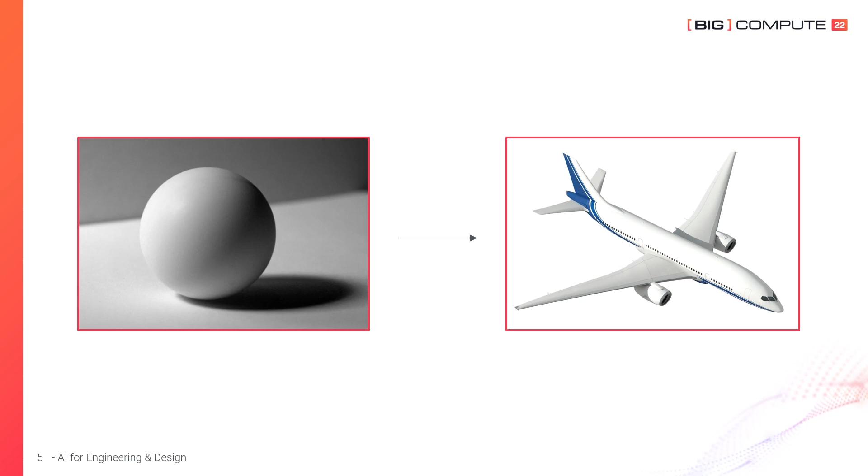So if we have a carefully designed algorithm and simulation and lots of computation power, we're able to automate a subset of designs, such as optimization of the wing and the shape of the wing, and the external aerodynamics of the aircraft. For example, we can take a sphere, put an optimization algorithm on top with a few constraints and objectives, and turn that sphere into an aircraft, as you can see here. Now, that's far from being able to design an aircraft from end to end, but it shows the potential.

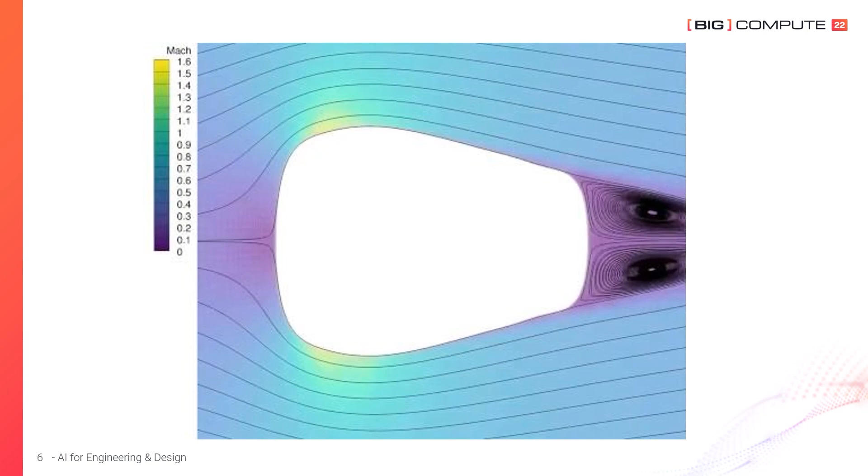So, why is it so difficult to achieve this? Today, why does designing a complex engineering system, such as a commercial aircraft, actually involve tens of thousands of engineers and years to come up with the design and achieve the objective? There are two factors leading to that. Number one, the algorithm is just not smart enough. What I mean is that if you have a well-defined problem with the objective and well-formulated constraints and boundary conditions, yes, the computer algorithm has proven to do very, very well. It can come up with an optimum design within that design space, and it can often come up with designs that are much better than what engineers can come up with.

Now, in a real-world situation, it's often very, very hard to come up with a well-formulated problem and a design space. In a real-world situation, you may have millions of different constraints, and even missing just one of them may lead to a useless design. So we need an algorithm that not only can explore this design space, but maybe is even able to come up with the design space or the problem itself. And that's where artificial intelligence and machine learning algorithms come into the picture.

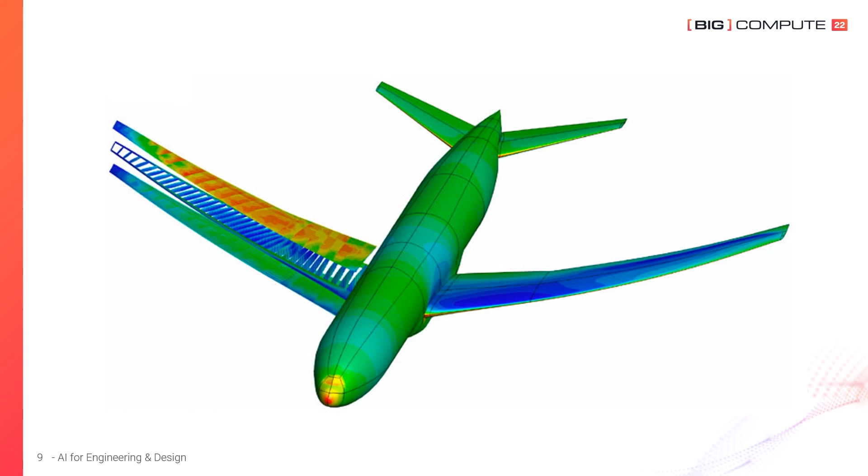Now we have had lots of advancement in this area in the last decade, and more recently, applied AI for engineering design. And we have seen many of our partners and customers start to develop specialized AI/ML algorithms and software tailored for their engineering simulations.

And we've seen also our cloud provider partners really develop some of the infrastructure layer to make it much easier to apply any of the AI/ML algorithms running on the cloud infrastructure. Now, while we're not there yet, that we're able to turn a sphere into a commercial aircraft design, we've seen that AI-assisted engineering is now starting to be applied in the industry. And you may hear some of those examples from our partner presentations today.

Now, the number two reason is the sheer amount of computation power needed to solve those problems, and solving them at a scale never seen and never done before. So with the advancement of cloud computing technology, those types of elastic or burst computational resources have now become more accessible. Particularly GPUs, where now you can use hundreds, if not thousands, of GPUs to run those large-scale trainings. And so engineers and scientists are now able to really leverage that, combining the different AI/ML algorithms to tackle those problems today.

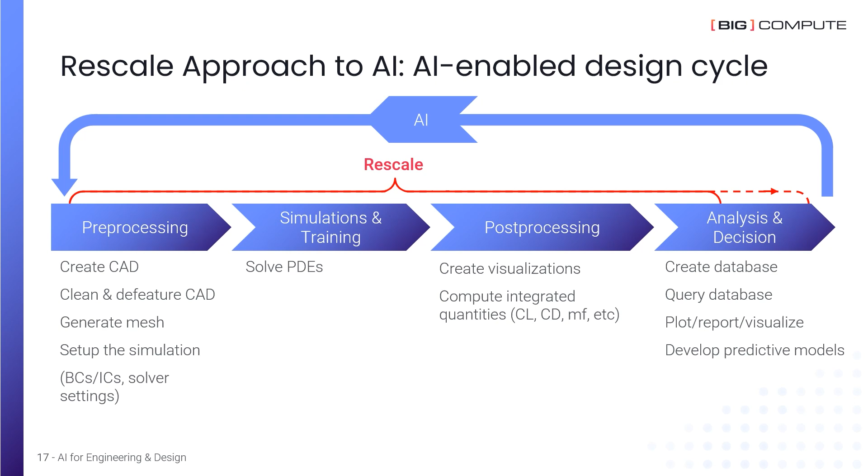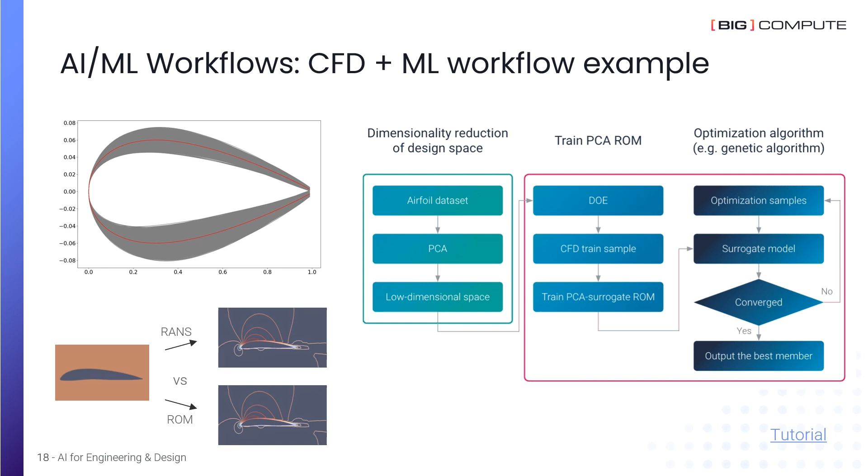So by AI for E&D, we mean automating this engineering design cycle and its subcomponents as much as possible by taking advantage of these new technologies on the Rescale platform. With this vision, we went on to develop example workflows relevant to some of our customers. For example, this ML-driven optimization workflow trains a surrogate model to rapidly design airfoils. This workflow not only produces a surrogate model for the end user, but it also uses a partially trained surrogate model to accelerate its own training process. You can take a look at this tutorial to learn more about this workflow.

Building the previous example helped us identify some of the gaps we have in the technical capabilities and expertise. As described in the diagram, building an AI-powered workflow at scale on cloud requires well-abstracted and scalable application layer and hardware infrastructure layer. So supporting the AI box on top would be exceedingly complex if we were to build all the capabilities from ground up.

So instead of aiming to build all these capabilities by ourselves, we build partnerships with other players in the ecosystem to integrate with their technologies and expertise. And two, we build core functionalities and interfaces needed to enable these integrations at scale. Now, let's take a look at some of the examples of these integrations.

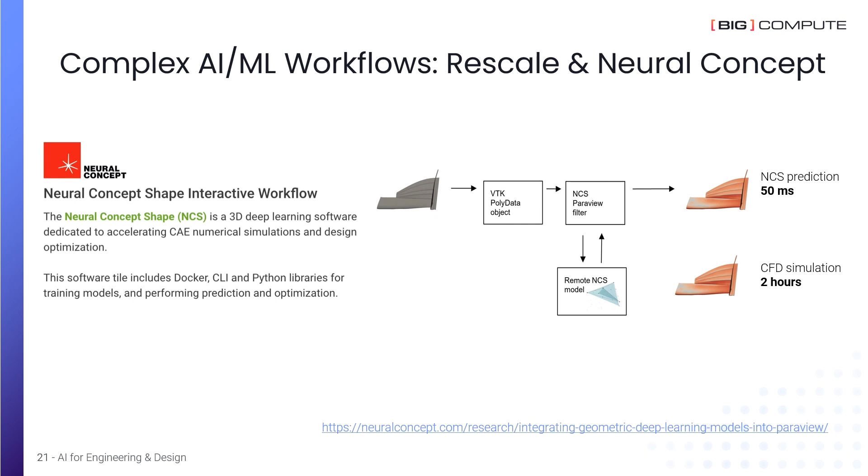The first example is our integration with AI-powered simulation technology of Neural Concept, an ML framework called NC Shape that enables users to develop surrogate models using simulation data. With these surrogate models, the engineers can estimate the impact of a design change much faster than they could by running a new simulation. For example, here it takes only 50 milliseconds, near real time, for NC Shape to come up with a reasonable prediction, whereas getting the same answer from an equivalent CFD simulation would take about 2 hours.

Furthermore, these surrogate models can be used in conjunction with pre- and post-processing tools to predict and visualize the impact of these changes practically in real time. This gives the design engineers the ability to rapidly iterate over the changes they would make without having to regenerate CFD-ready CAD geometry and computational grid.

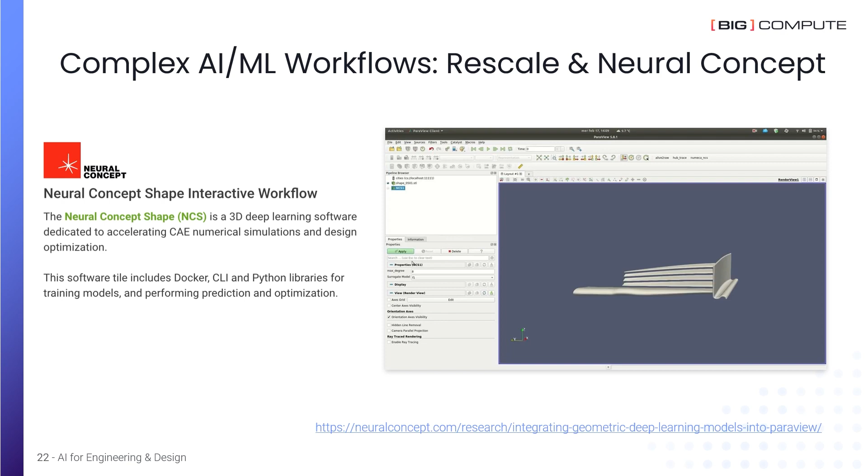The machine learning engineers interact with the framework over a Jupyter Notebook-based GUI to manage the simulations and data and to build and train the machine learning models. Then, the design engineers access these models to develop the product by running design studies and creating visualizations and reports. The partnership is beneficial to all parties involved, including the customer, because running NC Shape on Rescale makes the deployment and maintenance of these workflows much more scalable and more flexible.

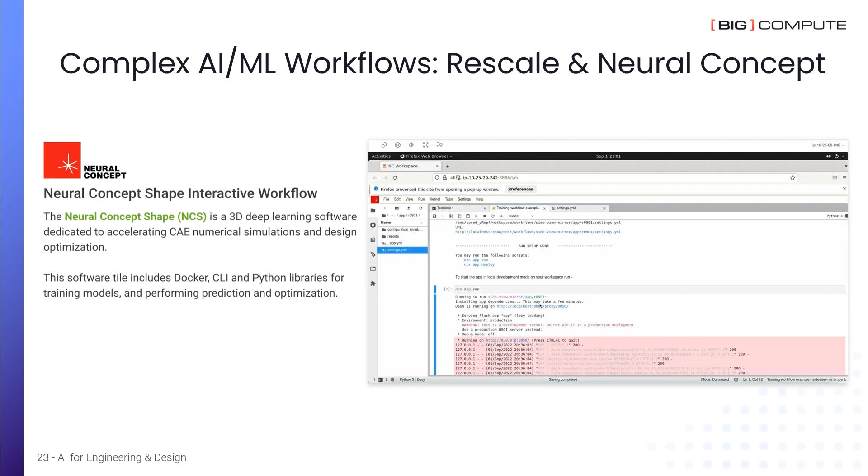In addition to Neural Concept, we have a major partnership effort going on with NVIDIA, which spans across the whole stack of NVIDIA AI software and hardware. NVIDIA is not only the leading AI chip designer, but it also is a major developer of AI and graphics software. Similar to HPC hardware and software by other providers, Rescale is very well positioned to bridge these applications with the hardware at scale across multiple CSPs.

On the hardware front, Rescale is able to utilize NVIDIA GPUs on all major and some special cloud service providers. We are also in the process of integrating with NVIDIA Base Command, which will provide Rescale users further access to DGX systems that they may own on their on-premises systems, or they may utilize on NVIDIA-owned data centers.

At the application and frameworks layer, we have integrations at various levels of maturity. Some have recently gone into production, such as the support for NVIDIA Modulus and NVIDIA NGC containers, and some others, such as NVIDIA Omniverse, are only at the roadmap level. Today, Rescale users can pull containers directly from the NGC repository maintained by NVIDIA. Many of these containers are optimized and tested by NVIDIA to run on different lines and generations of their hardware, removing that burden from the shoulders of the end users and IT staff.

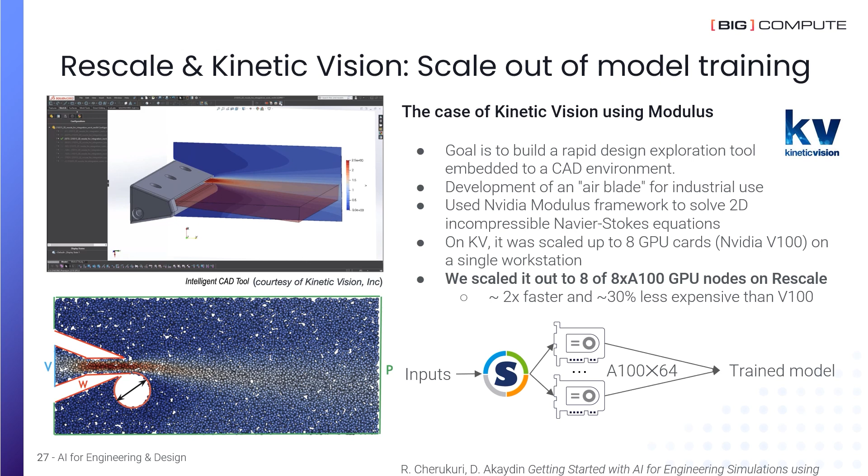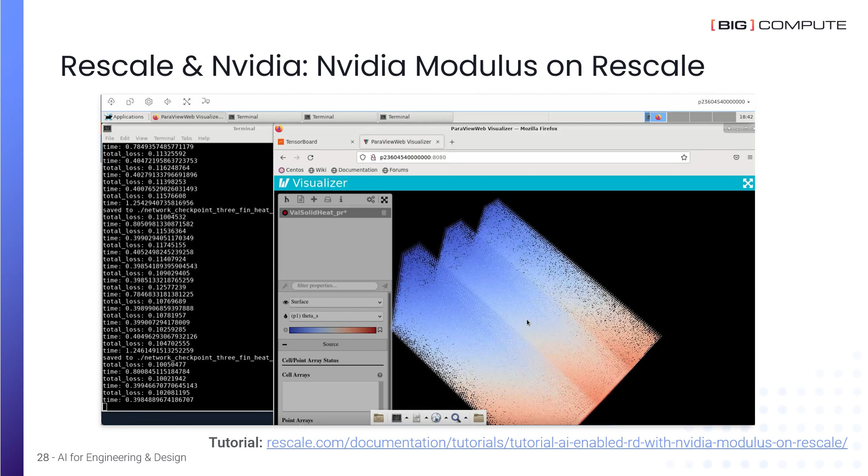If it's a batch job, it will automatically start running using the commands you specify. If it's a virtual workstation, it will come to life within several minutes with all the dependencies you wanted to see on the desktop environment. In this case, I'm fast forwarding to a previously created desktop environment with training already going on. As you can see, you can get a GUI environment with training going on multiple nodes. And there are also a variety of tools that you can install onto this workstation to visualize the progress of your training session. So now that the model is trained, it can be made usable for design engineers and other people downstream of the work.

And NVIDIA Omniverse in this case will be the natural extension to achieve this. With Omniverse, people from different teams can collaborate on the design process. The machine learning and simulation engineer would enable the trained model for, for example, the mechanical design engineer to run a rapid design study. And then the graphics designer could render beautiful images and videos of the proposed design, all through a remote collaboration session within Omniverse. As I mentioned, Omniverse is not yet available on Rescale, but it's on our roadmap with NVIDIA.